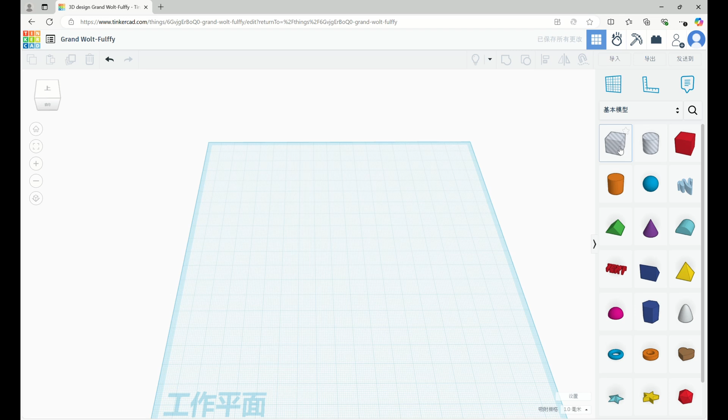The working plane is the area where you will do all the designing. Tinkercad provides rich basic shapes, such as cube, cylinder, sphere, etc. You can drag these shapes to the working plane and adjust their size and position.

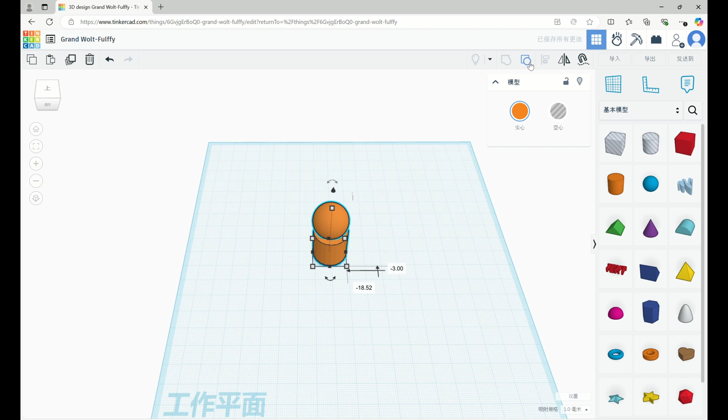Let's talk about the basic operations in the third step. The first one is grouping and ungrouping. If you want to group multiple shapes together, you can select them and click the Group button. If you want to modify some part of them, you can click Ungroup to separate the shapes.

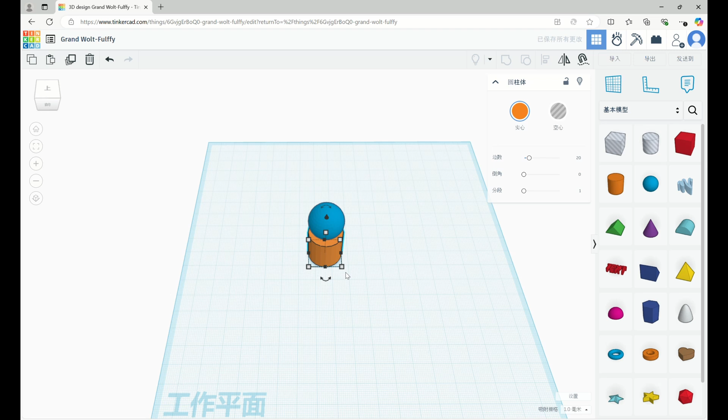Next is the Align tool. With the Align tool, you can precisely align multiple objects to make sure their positions are more accurate. You can also resize shapes, rotate them, or even duplicate them to create more parts.

In the design, you can use the hole shape to cut or create a cavity, and the solid shape to add material.

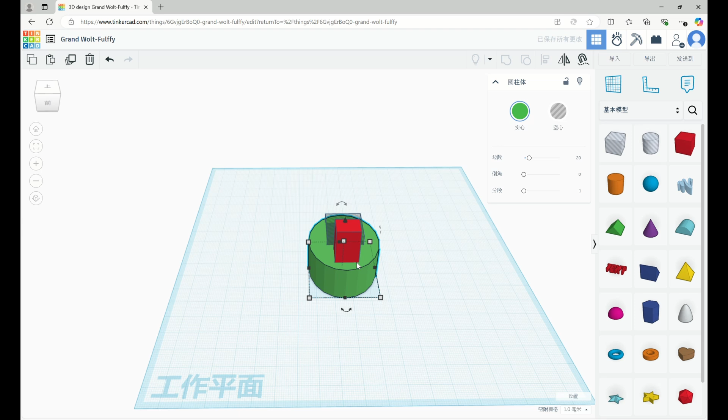You can apply different colors and materials to 3D objects in Tinkercad. This can help you better visualize your designs and make them more attractive.

Next, let's do a practical exercise, creating a robot chassis. What is a robot chassis? The chassis is the support structure of the robot or robot body, on which all electronic components, sensors and drive systems are mounted. The chassis is the backbone of the robot.

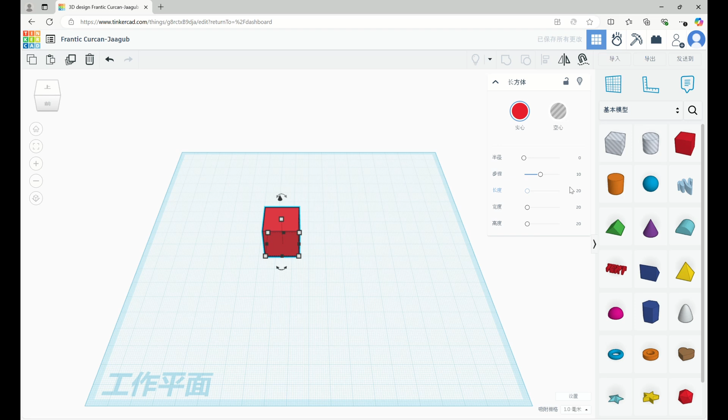Now let's get our hands dirty and create a robot chassis model. Click on the Create button and choose to create a 3D design, using a rectangular frame, adjusting the dimensions to a thickness of 3 mm, a width of 115 mm and a length of 196 mm.

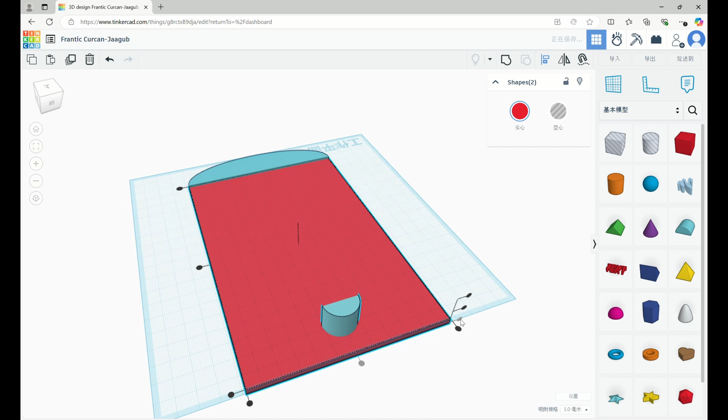After adjusting the shape, we can add some details to it. Holes can be punched in the chassis as needed to create space for connecting parts.

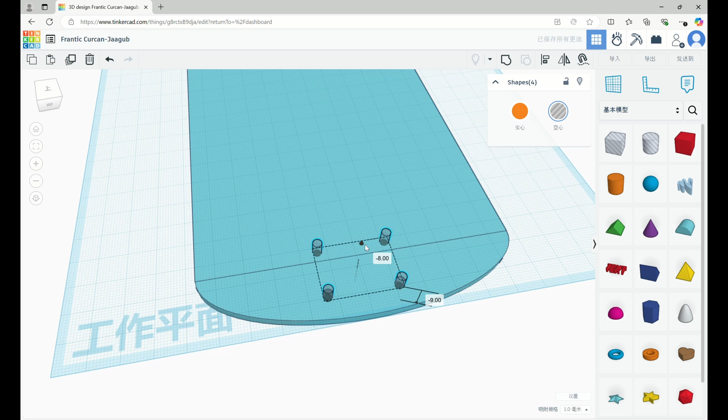Use an alignment tool to ensure that parts on the chassis are positioned symmetrically for easy installation of other components.

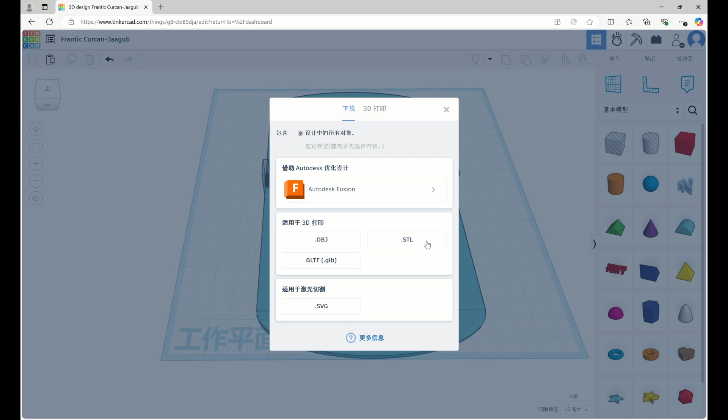Once the chassis design is complete, remember to save and export the STL file. This way, you can upload the design to a 3D printer for printing or even make it into an actual chassis assembly.

Today we were introduced to the basic concepts of computer-aided design and learned how to make Tinkercad perform simple 3D modeling. By creating a robot chassis, we mastered some basic operations in Tinkercad, such as shape adjustment, alignment, grouping and exporting, etc. Tinkercad is a great tool to get started with, and you can use it to continue to make more interesting designs, or even try to design other complex objects or structures.